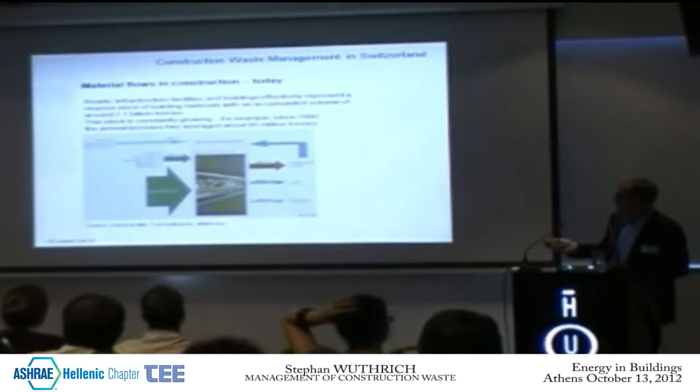Construction waste management - you see in the middle, it's the actual stock of the whole country, and you get the inputs like mostly gravel and sand, which gets in the system every year. We got here not this much, but it's cement. Here up, it's bitumen, and you get this 2.1 stock today. You see that there are some materials going out of the circle, and we try to get back as much as possible into this stock. So we try to get a certain balance.

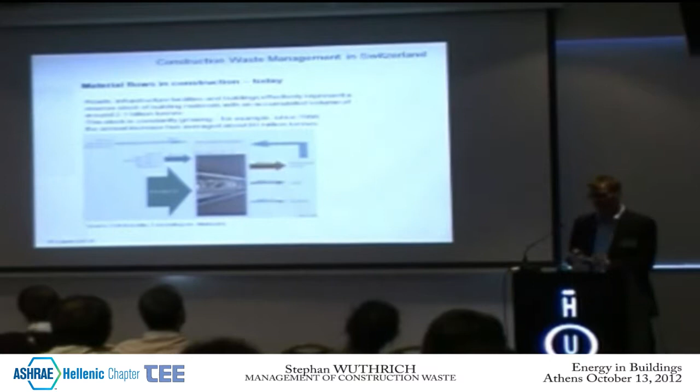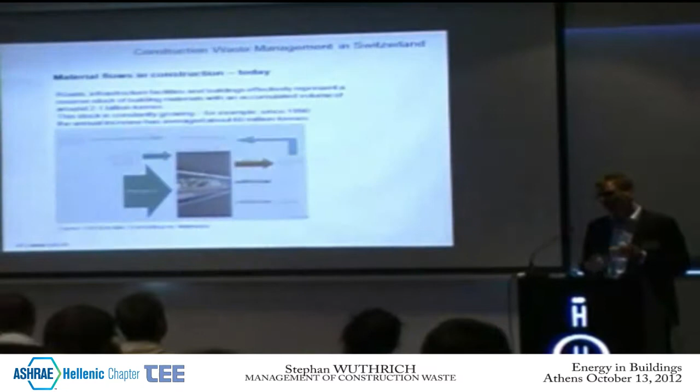I have a piece of concrete here, which is made of recycled material, which we'll see afterwards. Maybe I give it around. You can get an idea what it looks like, how it feels.

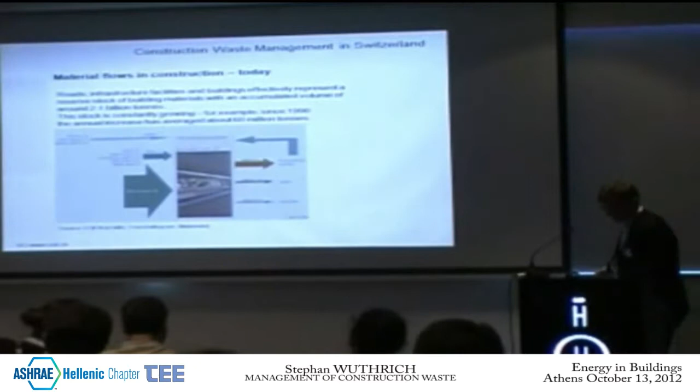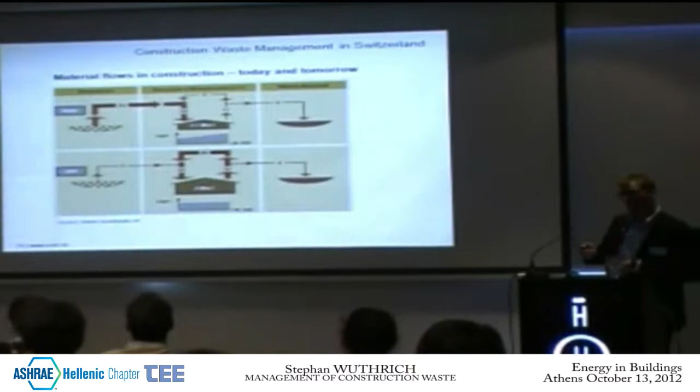So this was the actual situation. This here, you see in the upper part, today we get a lot of material into the system. The building stock is about 2.1 billion tons, and you see it's still increasing. Every year it's increasing about 60 million tons. Then you see our vision - we have got the vision that we should try to get a kind of balance, so we get the material we need for the stock, for the buildings.

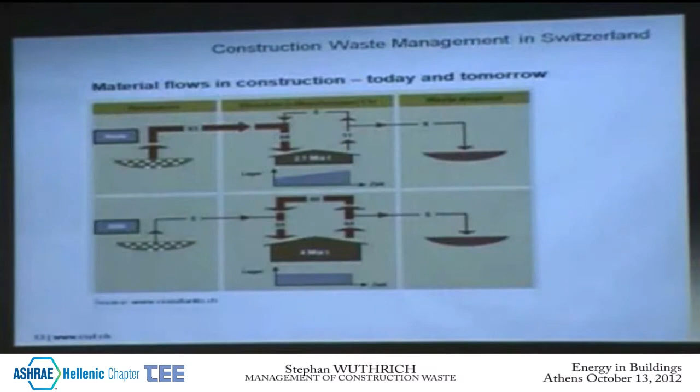We get it directly from the warehouse, if you want to. So we try to balance this kind of material flows. But this is a vision - you see it's 2050, so we hope to manage it one day, but it's a long way to go.

Some principal legislations in Switzerland: we try to avoid first. If we can't manage to avoid, we try to reduce, to reuse, and then to remove at the end of the life cycle. I think it's logic. Then since 2000 there is a ban of depositing combustible waste. We have recycling requirements where we have to recycle - we are not free in this choice.

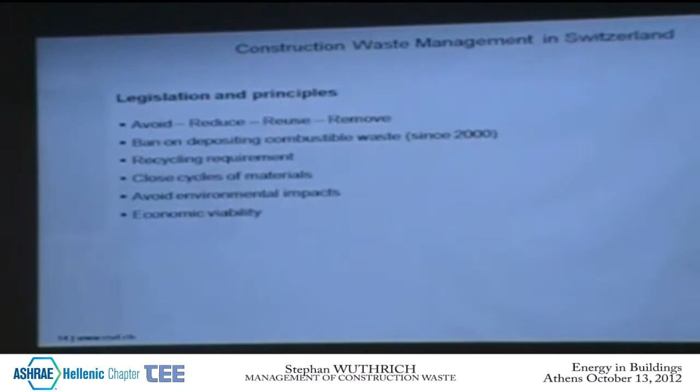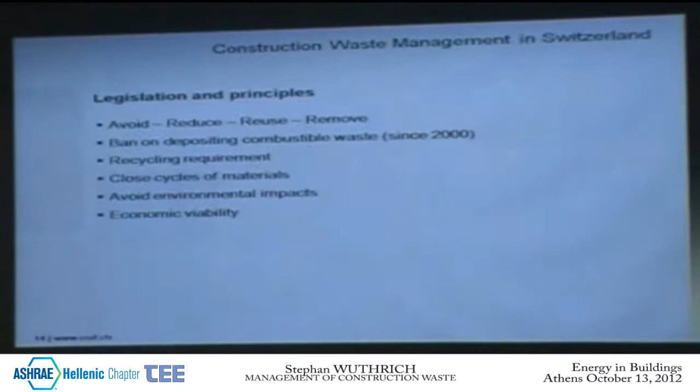We try to close the cycles of materials. We try to avoid the environmental impact. And of course, the economic viability is very important as well.

What types of construction waste do we classify? We talk about excavation from the big infrastructure projects, excavation from the soil. Then we have got the mineral construction waste, where you have the real material you can reuse. We have got the combustible construction waste, which goes to the incineration plant, which we can't reuse again. And we have others. We'll see it later.

If we take the mineral construction waste, we talk about asphalt, about road rubble, about concrete rubble, and about mixed rubble. And we try to separate these components as soon as possible, to declare it, if possible or if necessary to treat it, to ensure the quality, and then to get the actual primary material again.

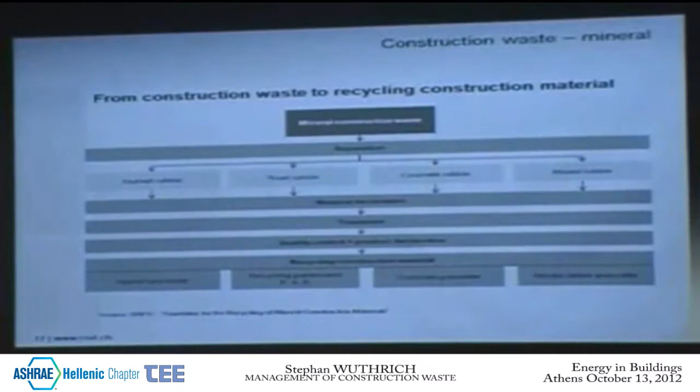So actually down here you get asphalt granulate, you get recycling gravel sand, we have got concrete granulate, which is the biggest part at the moment, and you got the mixed rubble granulate from the mixed materials. Here in pictures you see at the left the asphalt rubble from the infrastructure constructions, road rubble, concrete, and the mixed rubble, mainly bricks, when it's not possible to get it back in a proper way.

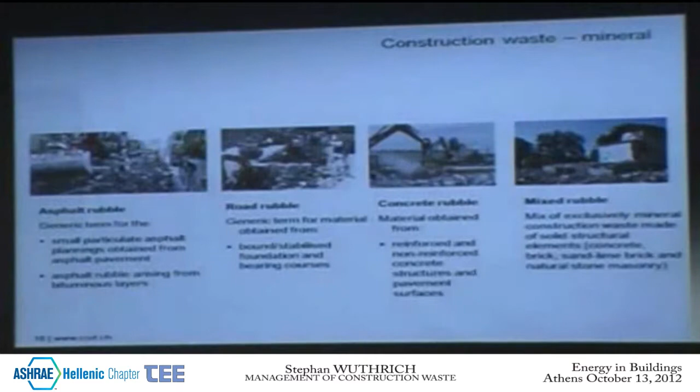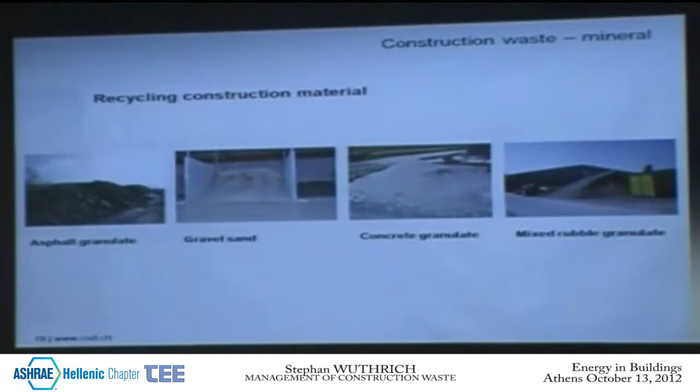And then the materials you get out: this asphalt granulate, which gets back in the circle. You have the gravel sand fraction, the concrete granulate, and this mixed rubble granulate looks like this, and it's what you can see in this example, which is circulating. The red spots in there are actually old bricks, and it's from this mixed rubble granulate.

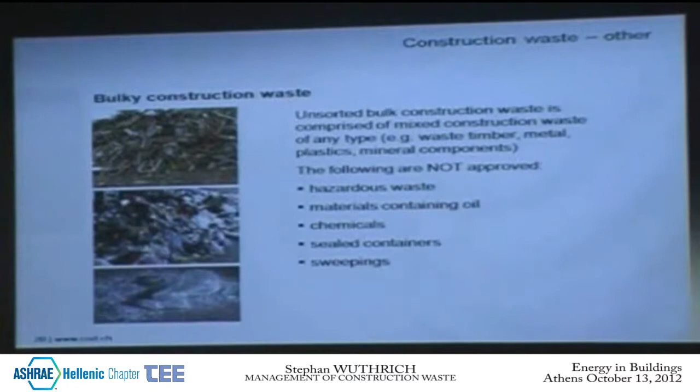Bulky construction waste is all that's unsorted. Sometimes when you have not a lot of space, it's not possible to sort it in a proper way, so you have to sort it afterwards in an installation plant where you try to get out most of the values, so you get away everything which is combustible, which goes after in the incineration plant, and we try even by manual sorting system to get out most of the values in this waste.

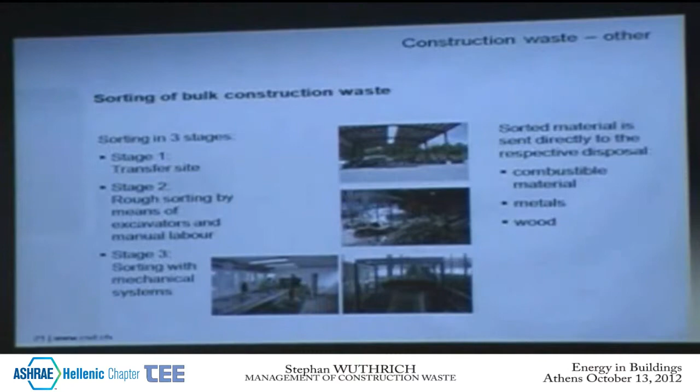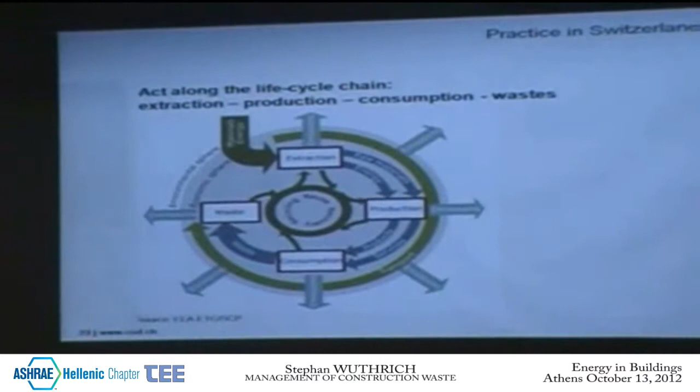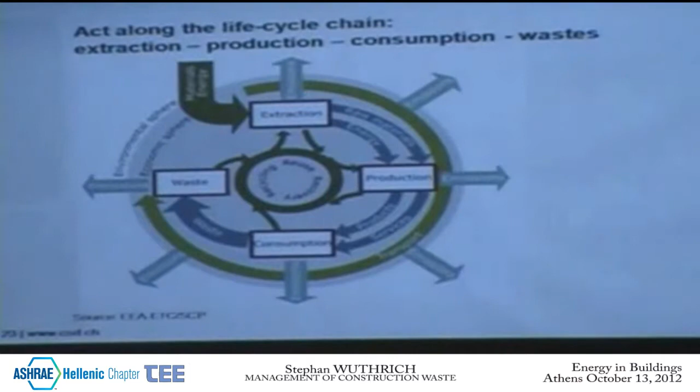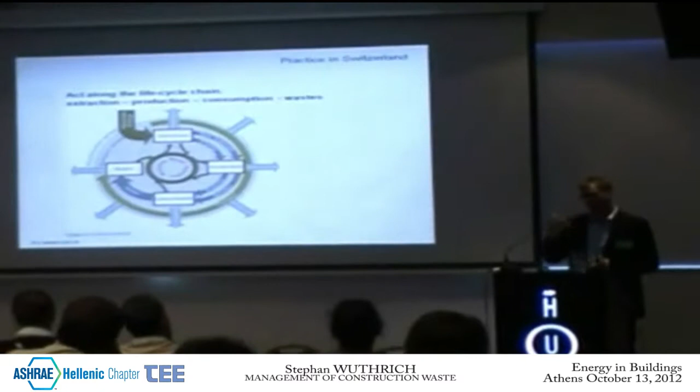Some practice in Switzerland, maybe some examples that can show you how we do it, why we do it this way. First, we try to act all along the life cycle. If you talk about waste, you talk about end-of-pipe solutions, and we try to act already before, in the production of the material, in the choice of the materials, in the planning of the buildings, not only at the end to say now we have to try to find a good solution at the end of the process. So it's the idea behind the life cycle approach.

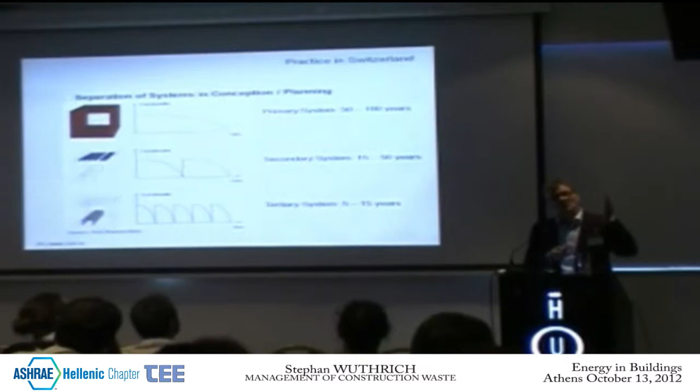One important experience is to separate the systems. If you have a primary system like this, imagine the primary structure which we build for 50 to 100 years. Then we have got secondary systems like the ventilation system or sanitary systems, maybe 15 to 50 years, it depends. And you have the tertiary system, about 5 to 15 years in this case here.

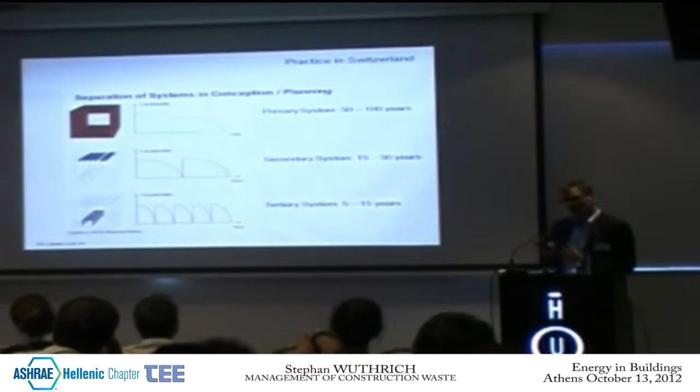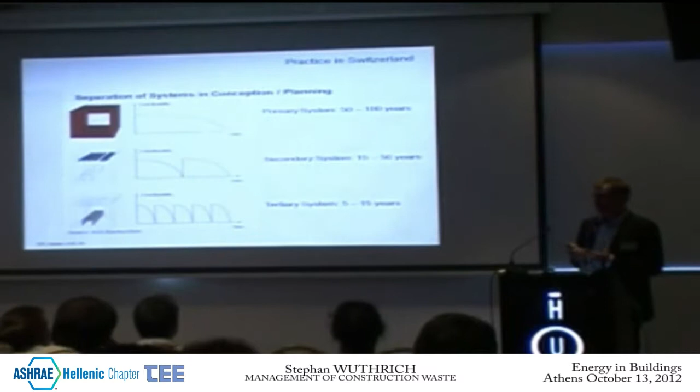So we try already in the planning phase, like it was made here actually, you see that you have different systems. They were separated so that it's possible to separate them after 20 years without damaging the primary structure, for instance, or there are other details, in the facade mainly, where you can apply this kind of principle.

Then we need a lot of planning aids. It's more or less best practices we got over the years, and especially the architects and the engineers, they got norms, standards, directives, and we get some practical help all over the process to help constructors and planners to get a good solution. So it's an important thing too.

I'm sorry that it's not all in English. I just got it like this, the way it is today in Switzerland. So I hope you can understand it.

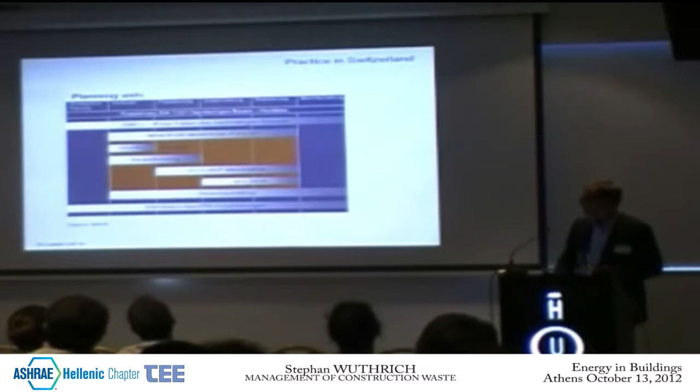Close the material cycles. I think it's more or less clear. It's to really deconstruct, not to demolish, and to reuse and to get it back in the primary material way.

Deconstruction: even in Switzerland, a lot of people talk about demolition today, but I think the right way is to talk about deconstruction, so that we really do it in a systematic way, in an order that's going to work. You prepare, you decontaminate in a way that you get off all the material which is problematic, all the material which disturbs you later, remove the interior, and you dismantle the building the same way that you were constructing it maybe 50 years before.

Another important thing is that if you want to get a permit for building, rebuilding or renovating, you need a deconstruction concept. You have to show how you handle all these materials. You have to show the authority how you want to plan this, and afterwards you get the permit. Otherwise you have no permit. So I think it's an important way to do it, otherwise nothing happens, and as soon as you get the permit you have like the green card and you go on. So it's an important principle today.

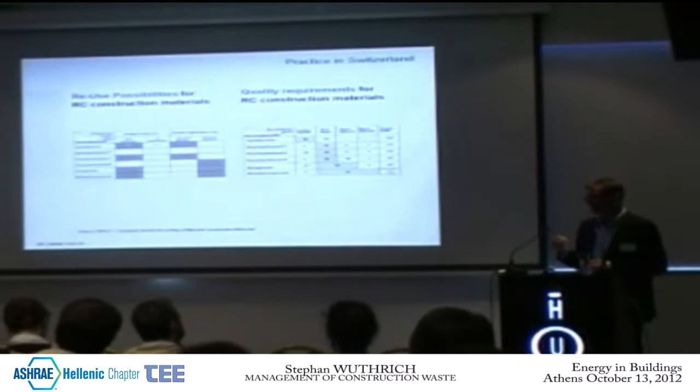What's very important is to know how you can reuse this material. I think there's no sense trying to get it back when you have no reuse. So for this we have some regulations. They show you how you can reuse this material, what kind of material at what place, according to the environmental legislation. This is one side. On the other hand, you need quality requirements. You have to define what recycled concrete material is, what mixed rubble is, to get a good material back, not to damage the materials and the buildings in the long term, and so that the image of the material also gets maintained.

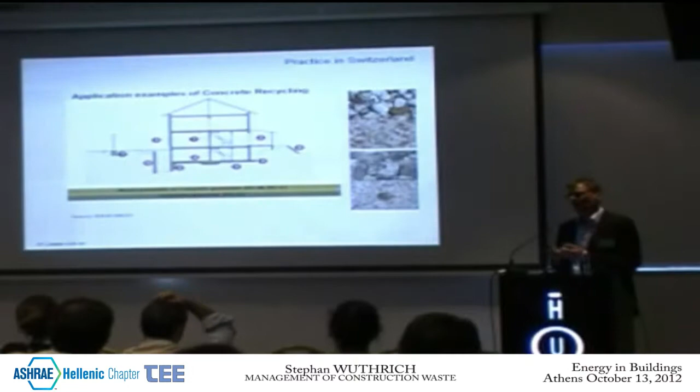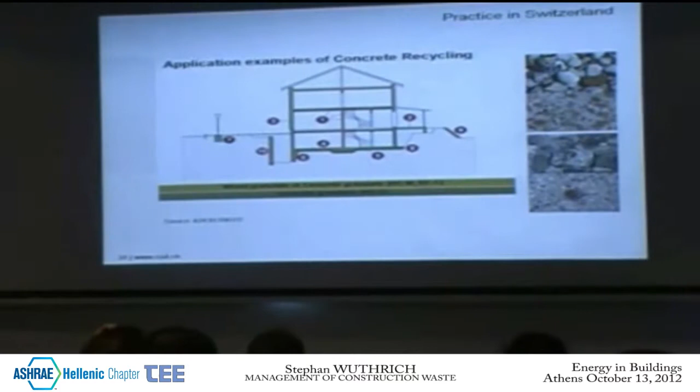Here is an application example of concrete recycling, how it's actually practiced in Switzerland. A lot of public authorities and public investors use these kinds of directives. It means that concrete granulate is not really a problem. You can use it even in the outside walls, and in everything in the cellar system, no problem. And the mixed granulate, bricks, a bit problematic material, you see it's no problem to get it inside the building. Today a lot of buildings are made this way. So we try to get it back really into the building system.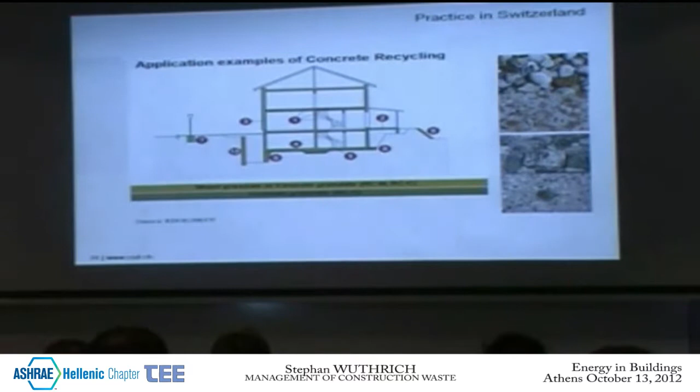There is a lot of innovation every year, it changes a lot, and it's a kind of change of behavior. Even the constructors help us; they try to go further and find new solutions to get this material back in a proper way, with treatments and pre-treatments, and to find a good way to put it back.

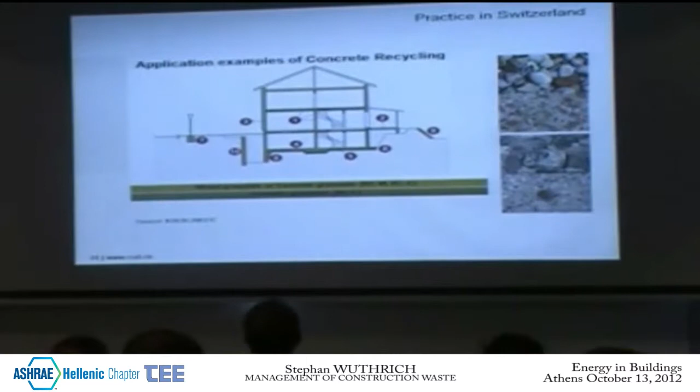What about the physical parameters of concrete recycling? It's not this easy. We can't say that it's the same quality. The engineers say, for me it's a problem because I have to ensure the quality of my building. And then you can see the 100% concrete granulate, it's around here. This diagram shows you the elastic modulus at this side, and here you've got the compressive strength.

So everything which is on pressure, it's not really a problem. You see that even with the material with mixed granulate, you get around 35, 40. So it's more or less the same. But if you look at the E-modulus, you need it for instance for ceilings where you have long, wide-span buildings. There it's more important to really take care about the choice of this material, and there you are better with the concrete granulate. So it's more sure to get a good product.

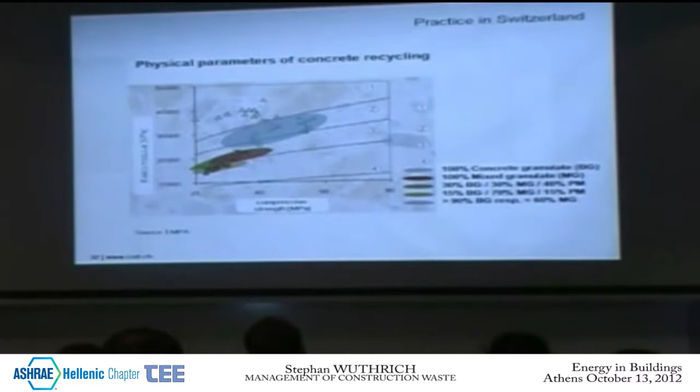What are the trends? In general, the trends, maybe even the facts. Actually, in Switzerland, we talk about recycling, not about disposal. Disposal at the end only if it's really necessary. We talk about waste management, and today more about resources management. So all the waste has a kind of value. Even if it's incineration waste, you can get some energy back. And especially it's important to say all the waste is a kind of resource.

So it's an important aspect. We don't want to talk about demolition, we want to talk about deconstruction. Cradle to cradle, very popular at the moment. A lot of people talking about cradle to cradle. Urban mining is getting popular, like we said before, this big warehouse, this big building park.

Then landfill mining is starting, especially in landfills where you've got a lot of metals, like from the incineration plants. There a lot of innovation is going on. We try to get this back, even from the landfills, to get out the values, the rare metals. And we want to improve the ecological footprint by product design. I think this is a trend which has been going on for a long time already.

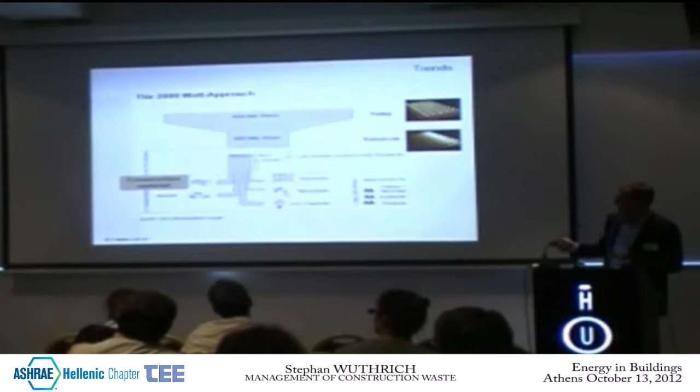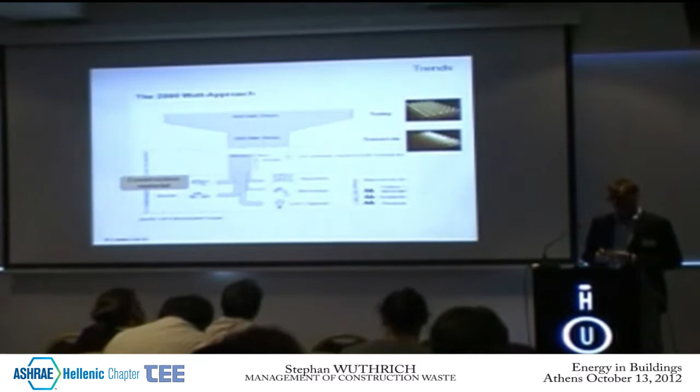And for this, the planner or the architect gets a budget for his 3, 4, 5 buildings. And then he has to work with this budget, with the construction material, with the mobility, everything which is around the warm water, heating, electricity. So it's his liberty how he does this, but at the end he has no more than 2,000 watt. So this is the actual way we try to go without taking the liberty from the planners and architects. And I think it's a good way to do it, and we have had very good experience in the last 2 or 3 years.

Another trend, I think, is about the labels, the standards. It helps us to ensure the quality. A lot of these standards have criteria like resources, you have to be efficient with the energy, you have to close the recycling loop, close the material flows. Especially like Minergie, which was presented this morning. There you have to show that you reuse recycled materials like concrete materials. So it's compulsory to use recycled material to get this label. So it's a way to motivate the investors, to motivate the planners to do it in this way.

And finally, even cross-certification. This is an actual project in Bern, where we get the Minergie P-Eco label. Minergie is for energy efficiency, and the Eco is for well-being, for everything which is material, resources, efficiency. And at the same time, we try to get the 2,000 watt society approach done in the same way, so that we can really talk about sustainable construction, building, not only energy, not only resources, but in a larger way of sustainable development.